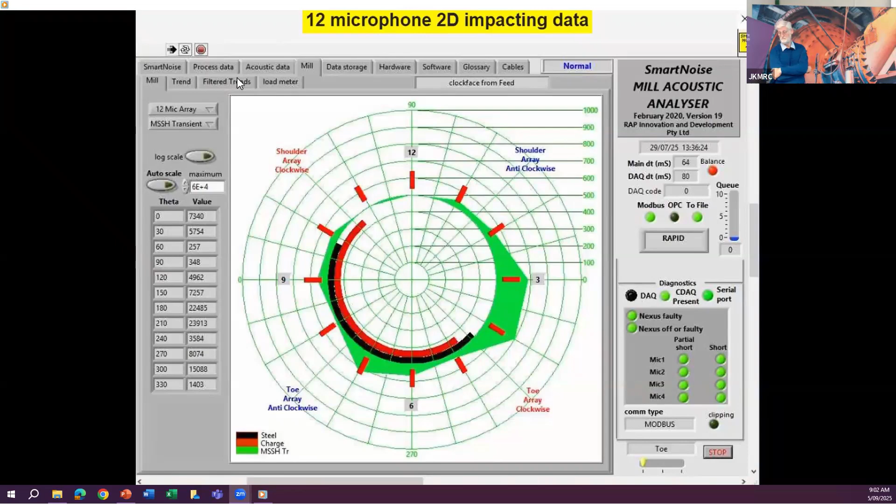What you were just seeing was the smart noise system, which I'll be talking about. It runs 100% of the time, doesn't have silly crashes, and that was real time on site, obviously a video. I've basically done the tech transfer out to sites with multiple installations.

As always, I stand on a lot of shoulders to get to what I've done and so on. And the presentation, I'll introduce a bit of grinding, not very elaborate, and then go through the measurement and acoustic measurement for grinding mills. The bottom photograph of me in my younger days, yes, I did have black hair.

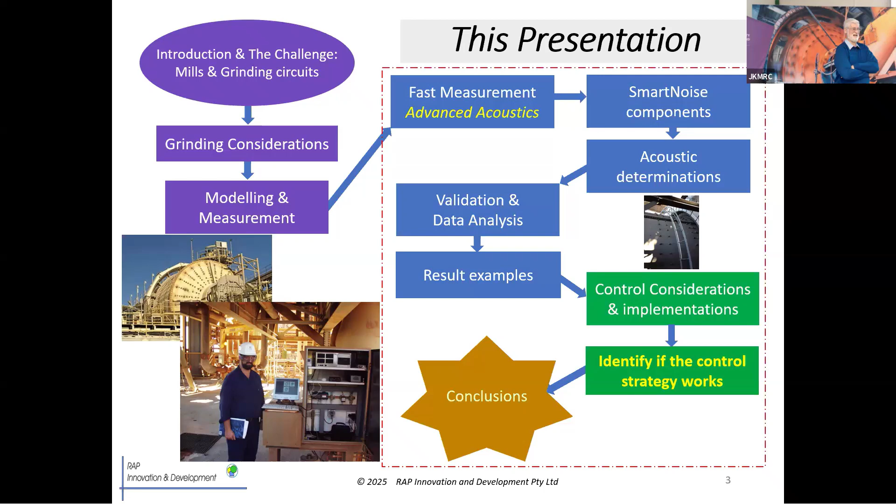Something happened along the way. And that was actually one of the installations where we had 8 microphones and strain gauges all mounted on a mill shell, and it all ran on a 133 Pentium, which some of you probably will ask, what's that? But I'll leave it as an exercise for you to find out what that is, maybe.

So, from a perspective, mining is a risky business. The object of mining is to obtain an element or a mineral because it's useful to Homo sapiens. We're Homo sapiens, us humans. We want these things so we can have our computers and roads and whatever else you name it, and toys for our kids. The process of mining has to cost less than the market price. The market price is dictated by demand, usefulness, and supply. Think lithium at the moment. It's gone through an enormous peak, and now rare earth minerals are becoming very much in demand, and the price is going up.

The risk is due to fluctuations, deviations in the technical and economic issues. But we also should bear in mind there's a lot of research being done, and has been done for a number of decades already, in development of competing materials for human endeavors. That particular reference, 2022, is a paper that talks about the chemistry of polymers, highly conductive polymers. So copper and silver won't necessarily be king in the future, and perhaps the demand for those minerals will decrease with time as more and more stuff gets done.

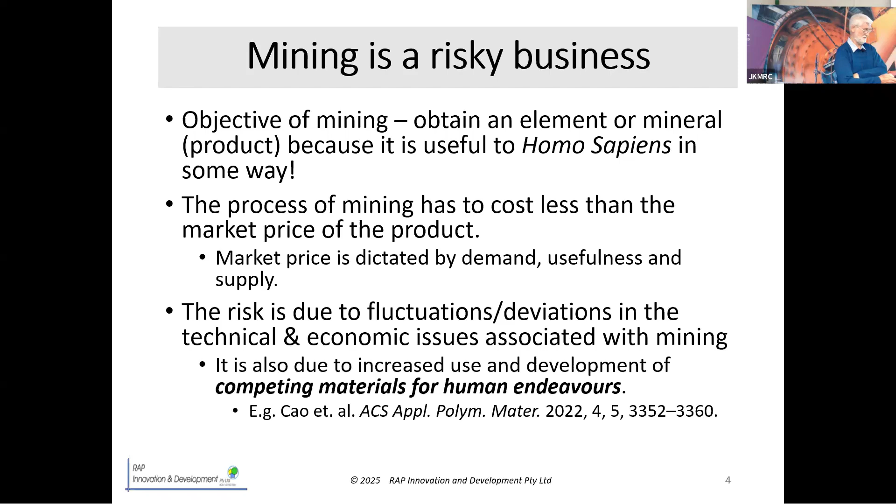If you do a literature search on polymeric materials or advanced polymeric materials, you'll find there's research being done all around the world. Risk mitigation models: one way of mitigating risk, which is also something that I believe we all do here, is use models. And we try to understand how our unit operations work.

We can use them for simulation like SimMet, plant design configuration, and we can use models within control schemes. However, the models are limited by the quality and quantity of the data. If empirical data is used, extrapolation is a dangerous thing. If it's real physical chemical models, then completeness is an issue. So, risk mitigation models: George Box in 1976 came up with this quote, which I'm sure we've all seen: all models are approximations, but some are useful.

However, it's not a license to ignore facts. Just because you've got a model that seems to work a good chunk of the time, it doesn't mean you know it all. Uncertainty is the status quo, and the world doesn't wait for the luxury of complete models.

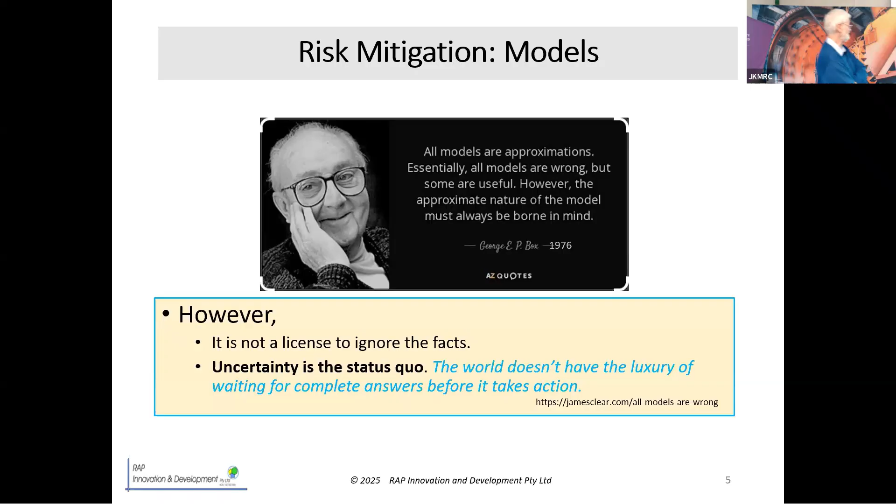So we need some measurement. The majority of plants have no or limited in-mill measurement, and virtually all measurements are conducted external to the unit operations. Some measurements are gross approximations or lack detail. And in this industry in particular, we rely on a very large number of particles in our processing, so we do what's called averaging, average behavior. Now, averages are a bit dangerous when they're done like that.

These measurements can be used within models, and we heard an excellent talk a few weeks ago by one of your people about soft sensing. It's come a long way here at the JK. Mill internal measurements are very challenging. It's a hostile environment, but smart noise tries to address that.

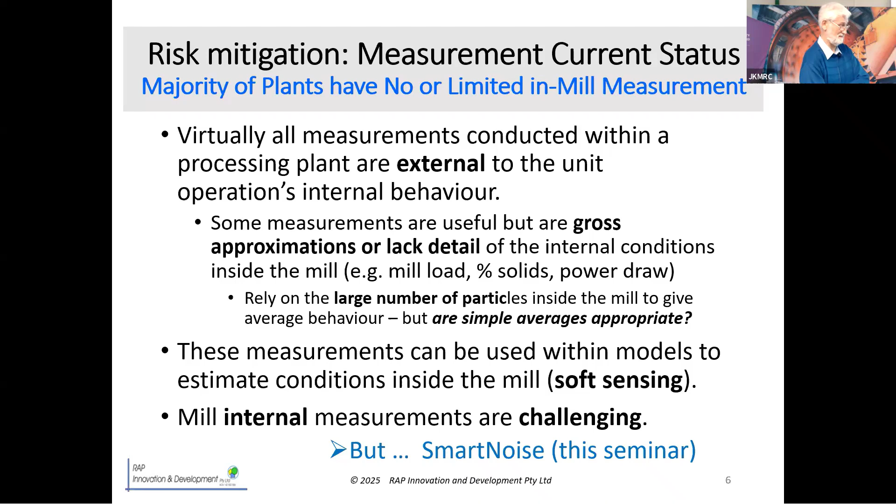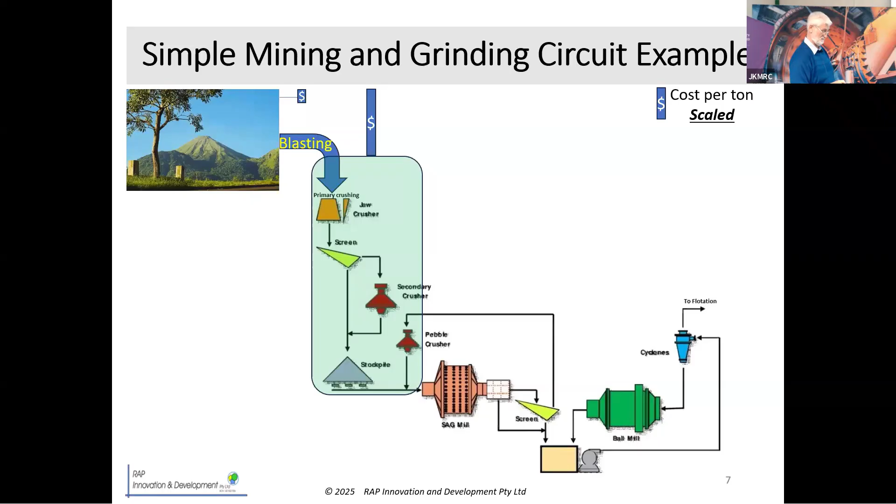So a simple grinding circuit, you've got a mountain, you've got some nice ore in there, and you geologists know more about how to deal with that side of things. It gets blasted. And notice I'm going to put up a set of vertical bars, which are cost per ton, and it's scaled. So the next step is crushing, and the next step is grinding, and there's a DEM calculation, a model, which is an approximation to real life.

And you notice first that the grinding cost is much greater than the other two. And in fact, 47%, according to this paper here, which is an old paper, of the energy cost of a mineral processing plant is in the grinding stage.

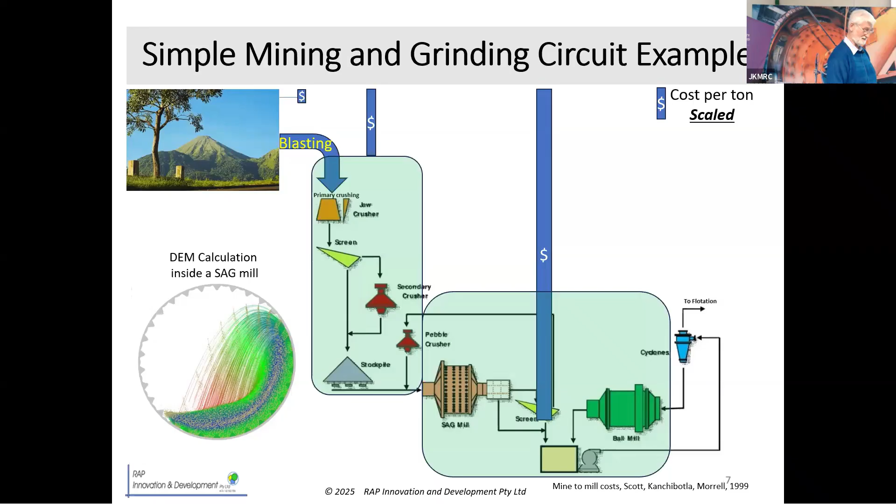Not very good. So to deal with this, again here at the JK, they were the first to do mine to mill, as in basically balance the blasting cost, which is cheap to do, against the grinding cost, which is much more expensive to do. The other thing you can do is improve measurement.

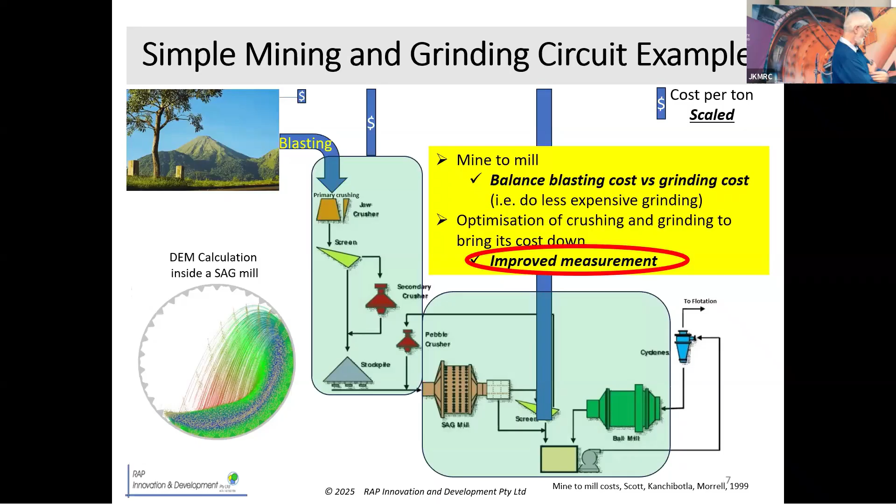And they had the technique to get these chips because they found them useful, cutting, whatever, poking, but they didn't have the maths. Now, in 1956, Broadbent and Callcott worked out a really nice matrix method for mathematically describing breakage. And in the 60s, Alban Lynch and the people, early days of JK, adapted it for hard ore breakage, and it's still used today.

So, operating conditions in grinding mills. We want optimal breakage rate, liberation, and throughput. The internal mill operating environment for ore breakage is very sensitive to feed ore variability in a mill. You speak to any operator, any metallurgist in the plant, or you play with it yourself, it's crazily sensitive, okay? You can't just hope for the best. It doesn't work that way.

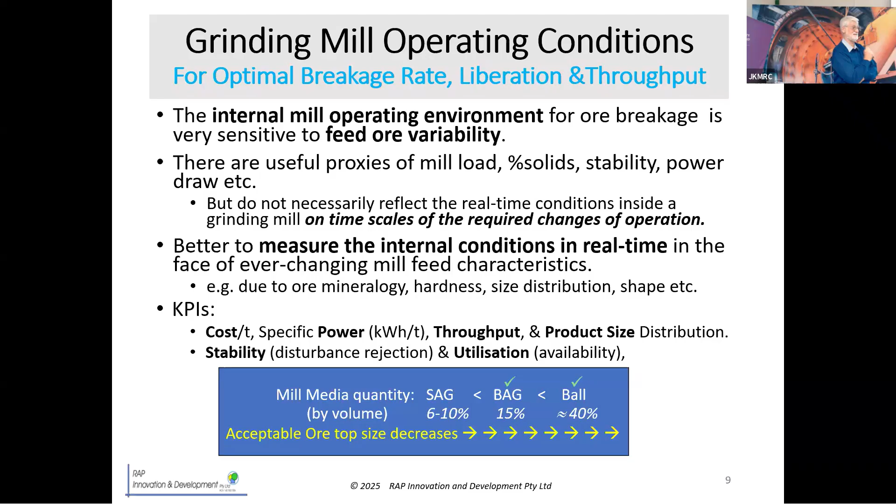For a ball mill, people have studied this in great detail. You might have 40 millimeter steel balls, but you can only put in something like 30 millimeter top size rocks, okay? It's quite significantly less. Unfortunately, people still think of bag mills as a SAG mill, and that causes them strife.

Utopia. Wouldn't it be great to be able to determine optimum conditions in real time? The new measurement could also inform new models, new timescales, new frequency content, i.e. dynamics. And ideally, the diagnostics you can do with this system should be quick, because time is money. I think of production gross value at roughly 2 million a day for most of the valuable ores we mine. So instead of spending a month, 2 months, 3 months to work out what a problem is with your circuit, if you can do it in a pleasant afternoon, you've saved yourself an absolute fortune.

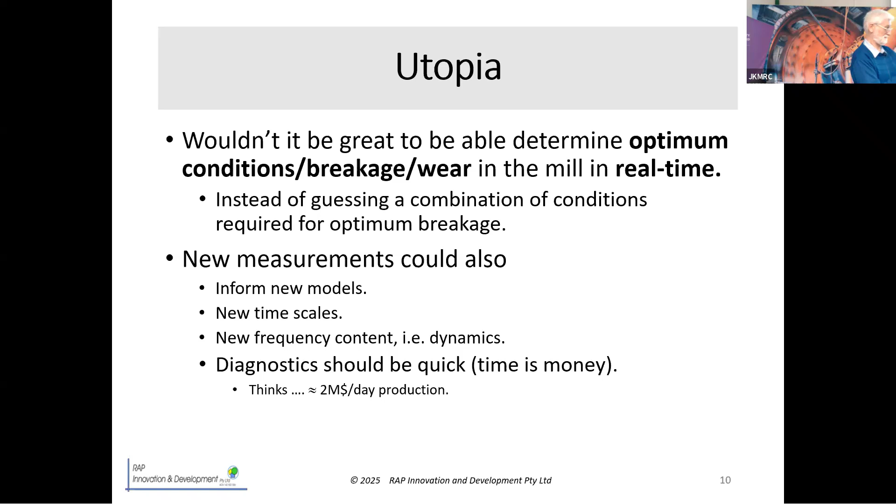So let's be curious with something new. Let's talk about noise. Noise from a mill is not random. It's actually a bunch of mechanisms, and it's an orchestra. The algorithms are about picking up those components of the orchestra.

The content of the noise depends on the circumferential position of the microphone. And you need particles to interact to generate noise. If I suddenly stop talking in this room and no one moves, you won't hear anything, correct? I start tapping it, and that's what's going on in the mill. It's the balls and the rocks tapping away. So noise only listens to that.

The toe and shoulder angles measured with noise will not be the same as for strain and vibration measurements. In practice, it turns out that the rock toe angle plus the rock steel toe angle, divided by 2 to take the average, is approximately the same as the strain. This has been used at one site to get the toe angle out from acoustic measurements, which can then be used in the power model to estimate the loading inside a mill.

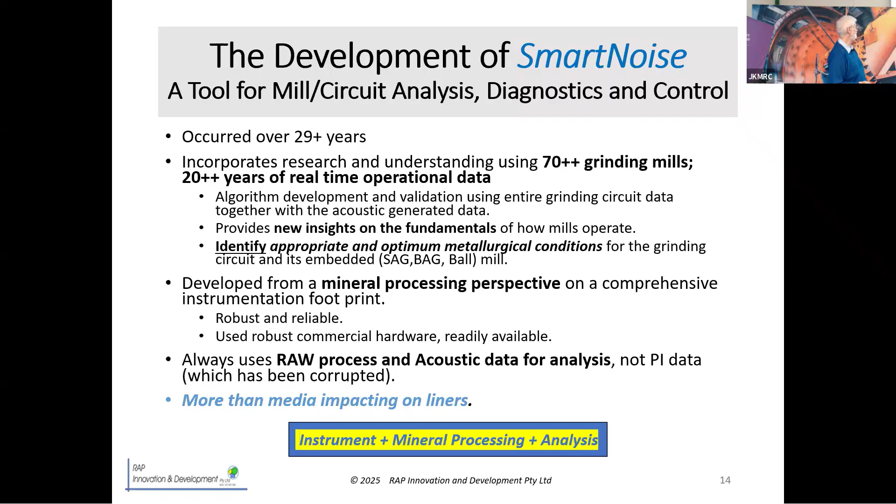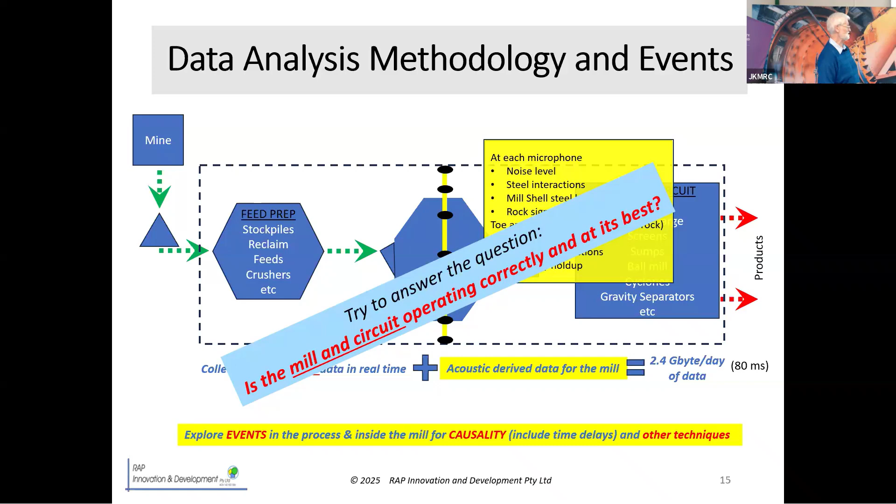And so Smart Noise is more than about media impacting. The methodology is to collect all the data, including the acoustic data. A row in one of my data files is around 350 data entries, and the rows are 80 milliseconds apart. So I collect a lot of data, trying to answer the question: is the mill and circuit operating correctly and at its best? I'm forever looking for events, and there's no shortage of events in a real plant - looking for causality and other issues.

So the Smart Noise system consists of 2 pieces of software, Smart Noise and Nexus Control, together with commercial hardware and communication with the site's DCS, to give us process data and also for remote access. We put together a comprehensive implementation and site support, training and documentation, data sheets and white papers. For those who don't know, white papers are discussion documents that tell you a bit more than the data sheets - more like a research paper, if you like. That's the system there: a mill, 12 microphones, amplifiers. The dotted line indicates what goes out in the field.

Occasionally, the field cabinet has to be internally air conditioned. And then there's communication to a computer, one bit for the Nexus control and the other bit for smart noise. And then there's obviously communication to the DCS at the site.

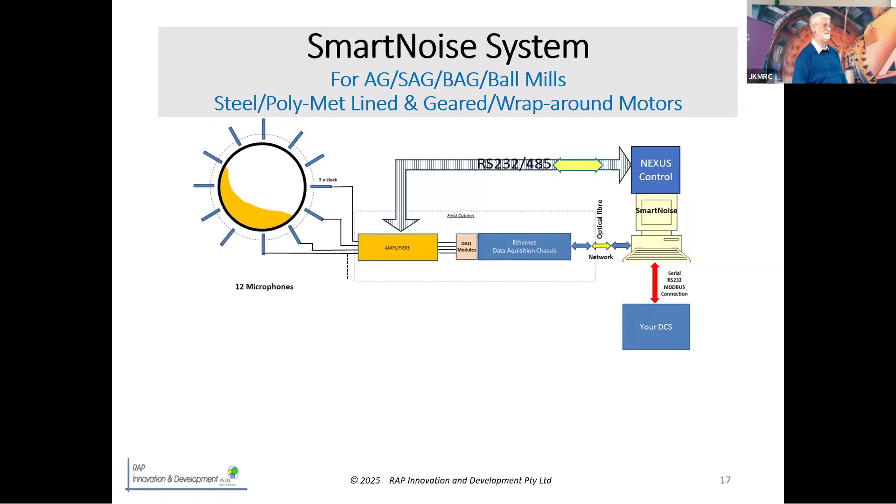With a switched on site team, once the equipment is in place, getting all this comms going and everything is trivial. I mean, it can happen in days.

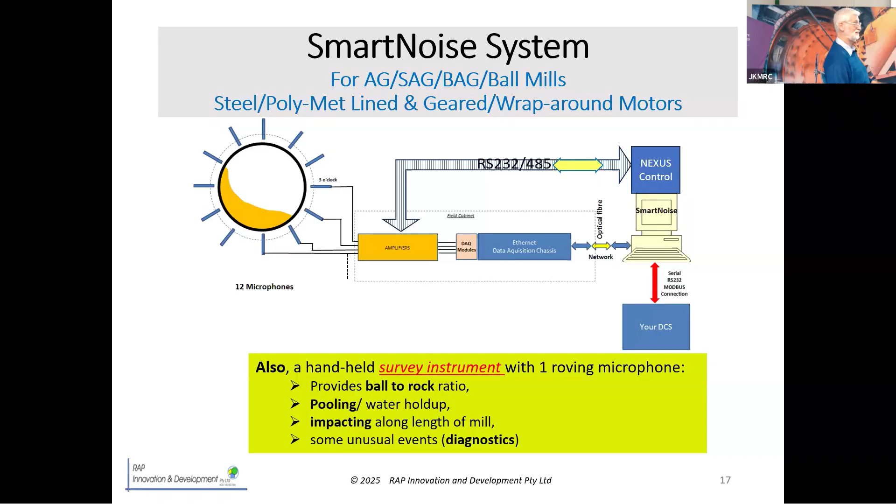There's also a handheld instrument. I take my laptop and a roving microphone with a little bit of electronics, and I measure along the length of the mill, both sides, and I've got more detail.

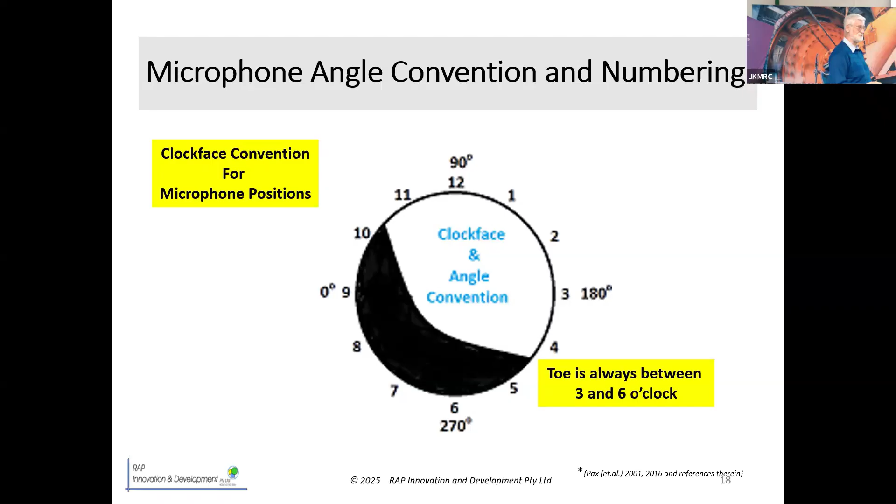The numbering convention is the clock face, or mirror of the clock face, an analog clock face, not a digital clock face. Digital doesn't work.

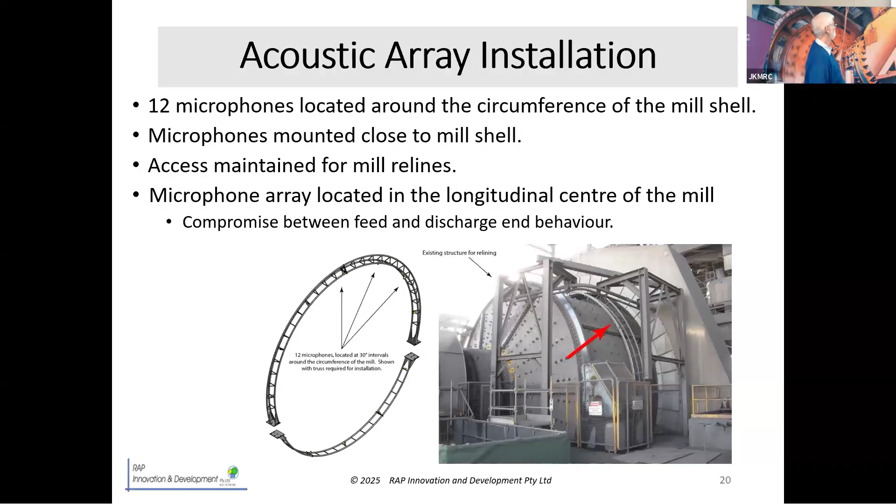They're very directional. So you've got to allow access for relines. And there's a microphone in place. They get grotty, that's not a problem.

Why 12 microphones? Normal competitor systems use 1 or 2 microphones. Some of them say rather cheekily they've got an array of 4 microphones. That means they've got 2 microphones for one direction and another 2 for the other direction. They've really only got 2 microphones operating at any one time. So each microphone has different information content, and at each location there's different impacting mechanisms.

The background noise rejection is much better than 60 dB. 60 dB means, with me talking, a pin drop onto this floor, it can still hear that. In the presence of me talking, the software and everything will still hear that pin drop. And in fact, I have done that. I can hear the screeching of the steel balls inside a mill as it's going around, and all sorts of stuff. I can pick up one ball if I wanted to, which I don't, but I have done for curiosity.

Simultaneous measurement allows 80 measurements per revolution, per mill, per microphone. 12 microphones also give me a massively increased robustness, reduced uncertainty and confidence of measurement. Because at the end of the day, those 12 microphones have to be connected in logic. What's that logic? Mineral processing, mill operation logic. Having one measurement doesn't do that.

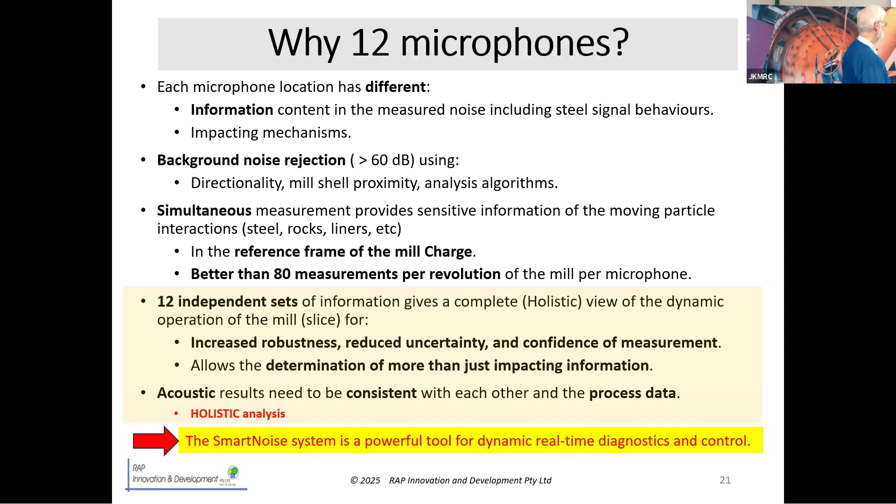And the steel signal determines only the steel interaction between steel objects in the mill. How have I tested this? One of the early tests was using it on an AG mill, a rubber-lined AG mill, no less. And the signal went to 0. It wasn't there, so that's really nice. And then I've had other confirmations as well.

In the ideal situation of rocks and media in a mill interacting strongly, the steel signal is at a minimum. It's not 0, but it's a minimum. If there's not enough rocks in the mill, the media interact a little bit more. And if there's no rocks, the steel signals go through the roof. That's a grind out, and I really mean through the roof. Typical numbers, maybe my units 1, this through the roof signal, 10,000. Very sensitive.

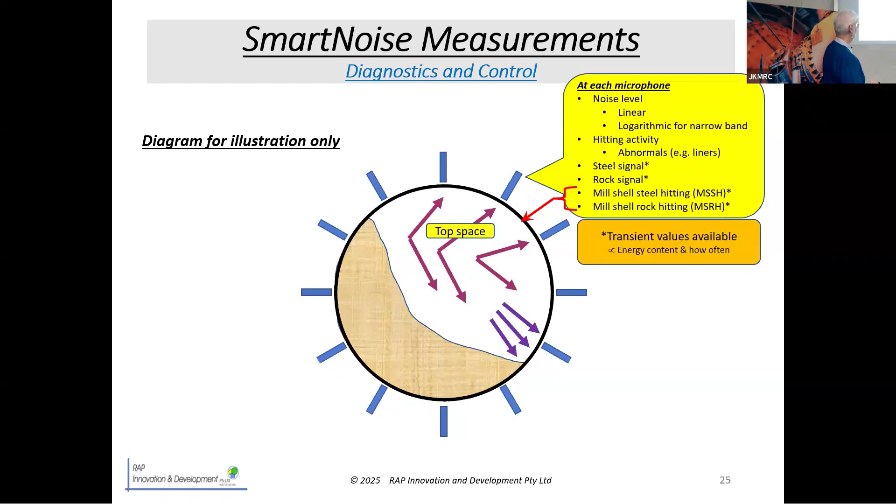Normal high-speed impacting or normal speed impacting. There's also something which is one of the new results: top space. Now those DEM calculations, trajectory calculations, etc., say that doesn't happen. It shouldn't be happening. Well, it's not true - it does happen, and there are good reasons for it happening. It's basically a billiard table in the top half of the mill.

I measure shoulder angles and toe angles. I measure the ball to rock ratio at that microphone. I also measure the water/slurry holdup. Marco, notice my little thing there - I know that's wrong, that picture is wrong, but this diagram is for illustration only.

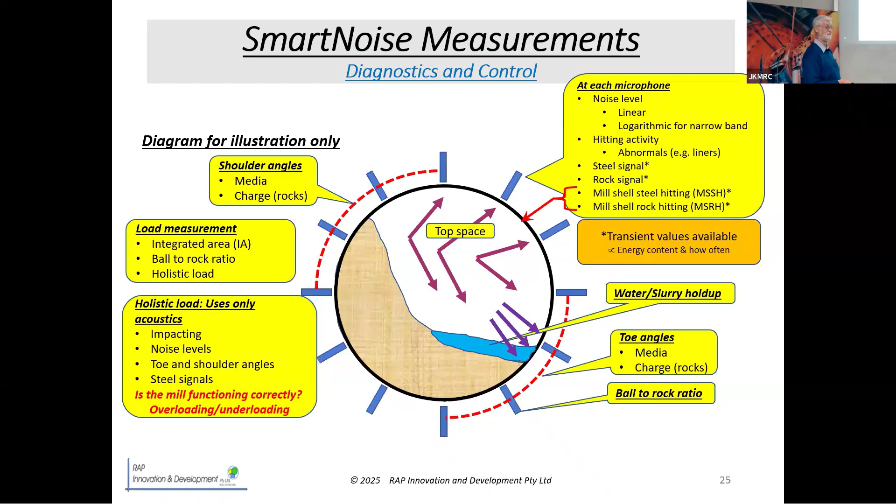I have load measurements, which are integrated area, ball to rock ratio, and holistic load, which I'll come to. The holistic load uses basically all 12 microphones, so it's an all acoustic load measurement. These signals can be used for all sorts of control aspects as well, to provide a logical, self-consistent diagnostic picture of a mill.

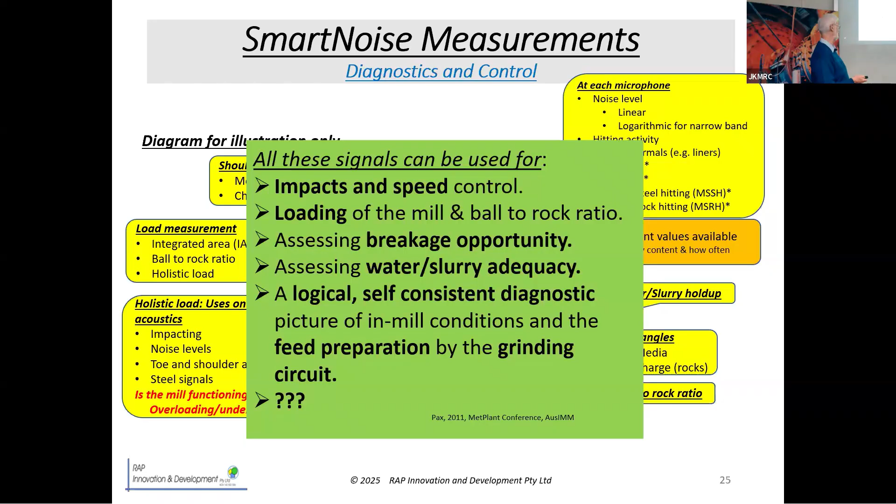So much so that when a system first starts up, it's all been installed, I switch it on, have a look at the thing, and I immediately pick up a few points important for the site, for their grinding mill, that they weren't aware of. And this has happened all the time. You saw before the beginning of this presentation, an interface.

The SmartNoise interface - this is just a summary. The only bits I really use are these last two, which summarize the acoustic outputs. And of course, I want to see if the mill is running and its percent critical. The real speed isn't really important, but the more useful number is the percent critical. There's all this diagnostics over here to tell me whether the system is functioning properly or not.

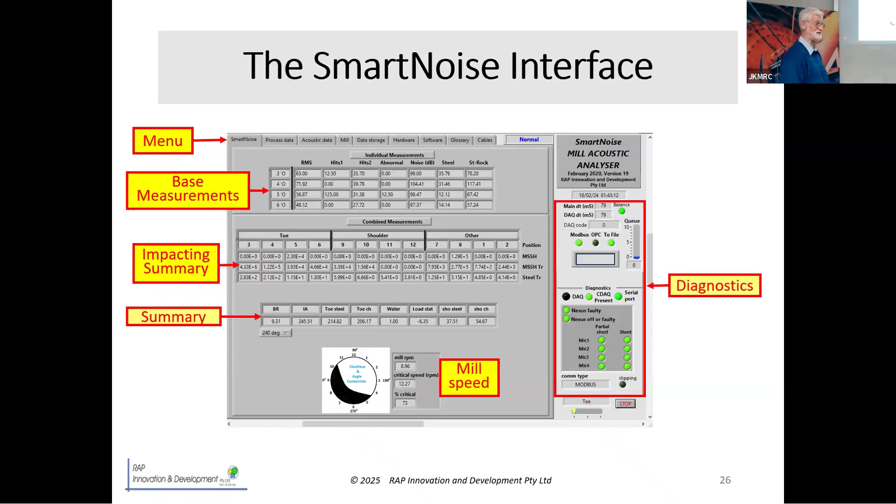The other thing possible with this software is the time scales on the process data and the acoustic data can be made exactly the same, 44 minutes, so you can compare like with like. In this particular case, just to illustrate the power of it, here's the scats rate or pebble generation, and we can see the toe angle being influenced by the scats - obviously there's internal stuff going on that's influencing the steel shoulder angle.

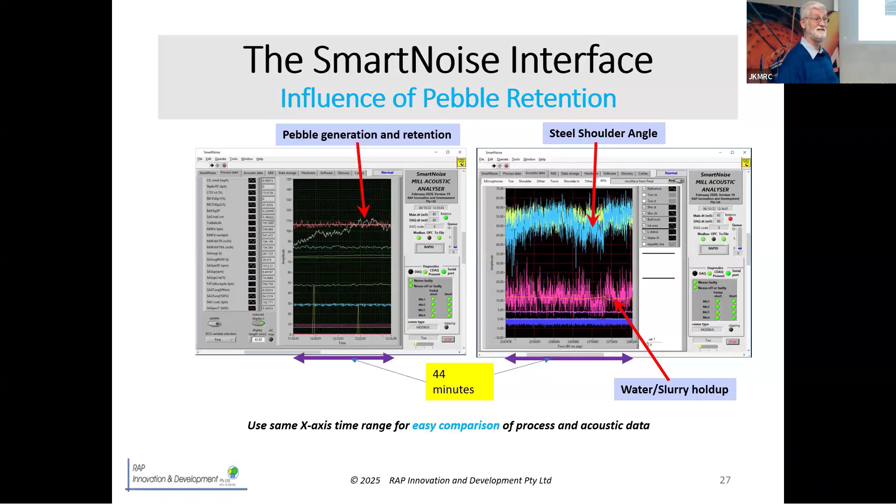Here's a little experiment where we unloaded a mill and then loaded it up again. The blue line is load cell values, and the green line is the steel signal. The thing that really strikes you with this data is that the steel signal basically saturates before the load cell values - in other words, the rock is in between the steel balls, but the steel balls can't capture any more rocks in their midst.

But the rocks are still piling in, and so essentially you end up with an extra phase. So another revelation is these mills can operate and get to the point where there are two phases in the mill: a steel plus rock phase, and a rock only phase.

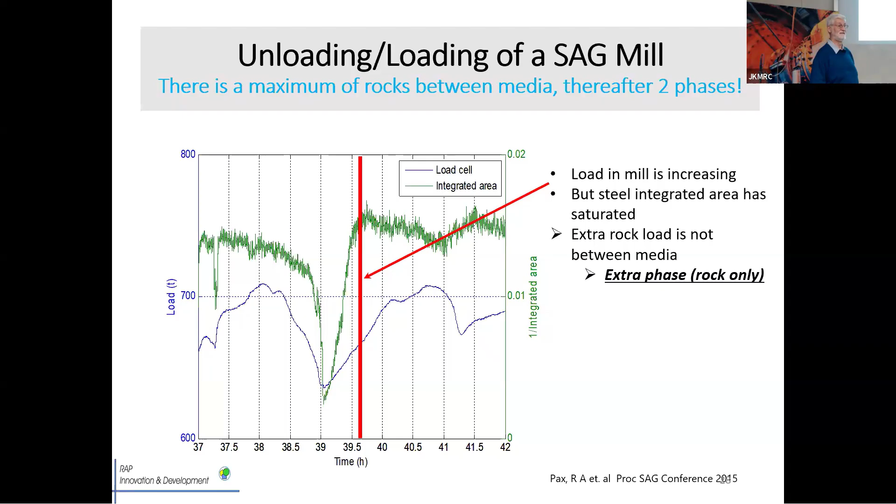Here's another validation point, ball to rock ratio, using crash stop data - as in opening the mill and measuring and coming up with what the load is inside the mill versus the steel signal. And we see quite large errors. It's not something this industry talks about much, error bars, but the error bars on the crash stop data are much larger than on the steel signal, and that's an acceptable correlation.

We also did a test where a bulldozer put very large rocks into the mill, and they didn't integrate with the steel balls very well. That shows up here as a data point that doesn't fit on that other correlation. It's a nice validation point of the steel signal, showing we're actually measuring real mineral processing stuff inside the mill.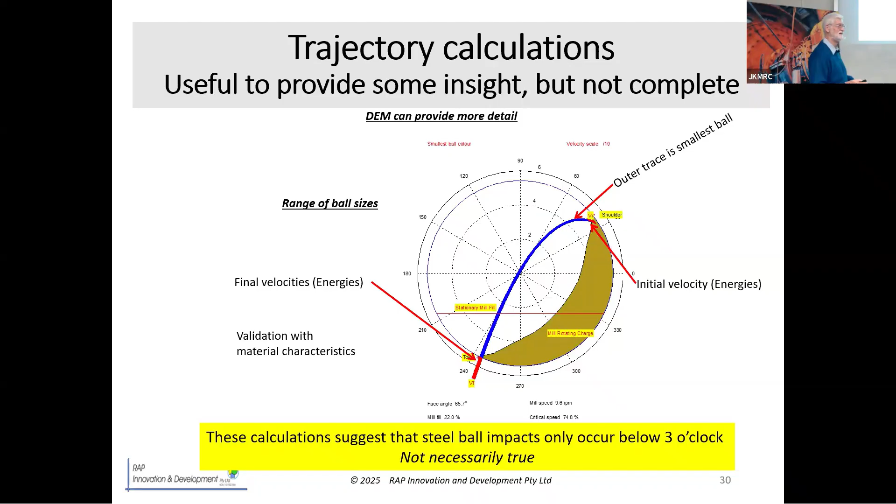They're quite nice, actually. So when you use your microphones around the mill, these are the two conventional microphones. You see a lot of activity. I've got the process data, and you're seeing a lot of activity.

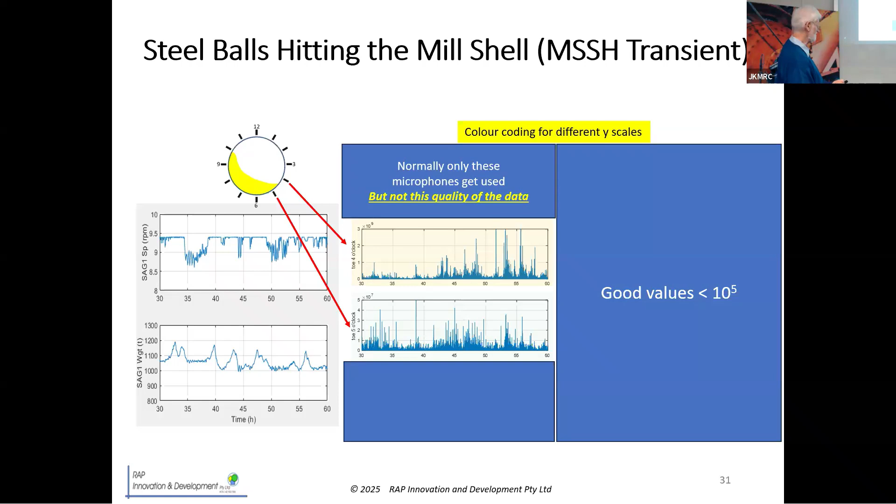If we now go to some of the other microphones, including the shoulder space on the right-hand side, there's stuff happening everywhere, okay? And because of the directionality of the microphones, you've got unique measurements. The stuff happening on the far side of the mill compared to where you're measuring with a microphone, it's just not hearing that. It's down in the noise. This is stuff happening at each location.

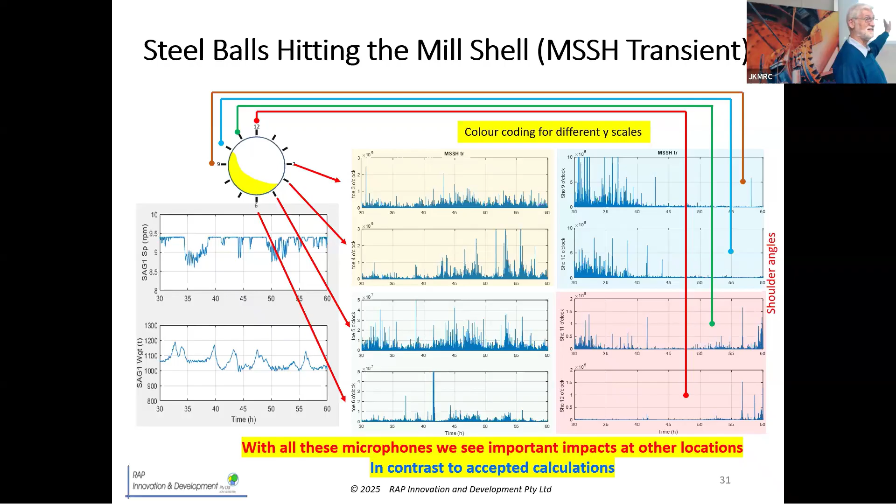And you can do a 3D version of the impacting around the mill, and you're seeing impacting in the top space. You're seeing conventional impacting. There's, to even get a steel ball going to 3 o'clock, you need special conditions.

The code for the trajectory thing, I was on site and it suddenly hit me that something was amiss. Why am I hearing things at 3 o'clock? So I wrote my own code, spent a day doing it, getting it working, all in MATLAB, and did what I just explained to you.

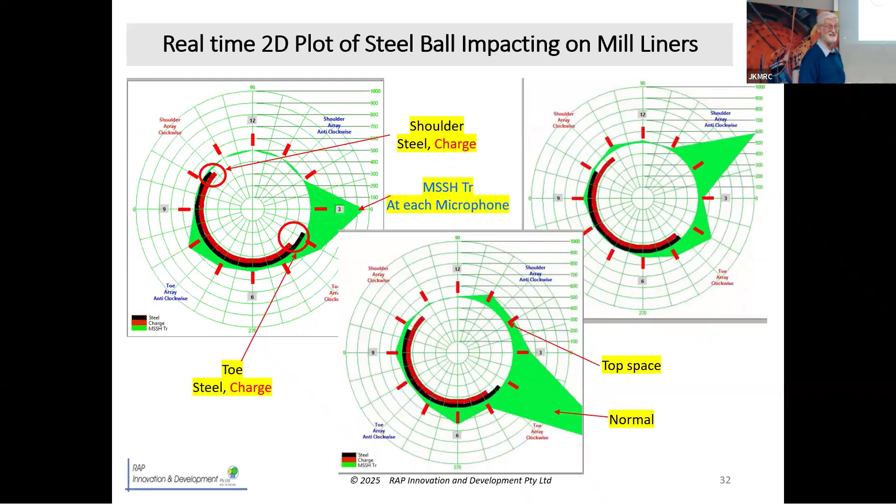A much more powerful way of presenting this data is like so. Here we've got microphone position. I see, if I keep it down, it does more screens. I see, I get it.

On the right-hand side, you're seeing impacting at virtually every position, including the top space. But notice this discontinuity at 6 o'clock, okay? Because that's where the gravity is supporting the charge going down. And on the other side, gravity is not supporting the charge going down—the lifters are doing the work.

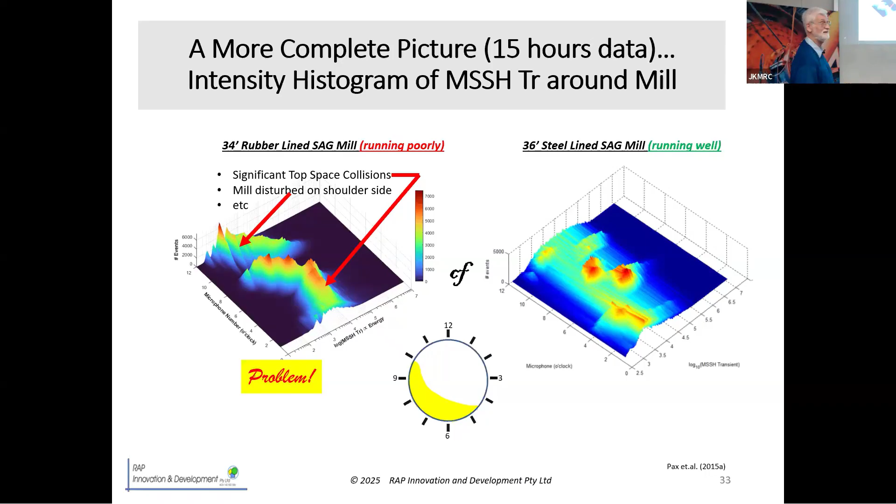In contrast, for a polymet lined mill, similar size, they've got real problems, okay? They should be getting what I'm showing on the right-hand side, but they've got balls flying everywhere. And there's even some structure here, which I won't go into, which is stuff going on in the shoulder space.

Okay, factors affecting media impacting. Well, speed—everyone knows about speed. I'm always at pains to explain to people, rheology is really important, okay? If it gets really sticky, and it does get really sticky up there in the shoulder space, then you're going to delay steel balls leaving the lifters. Or particle size, maybe shape, because it pins the balls onto the lifters.

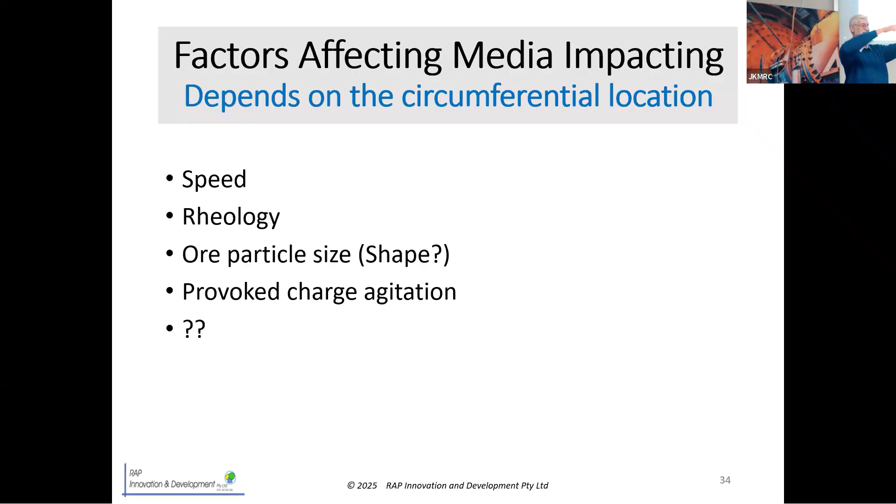And I've had a recent discussion with Paul Cleary, who in my book is the guru of DEM. And he actually asked me whether I see that. And I said, yes, I do. It shows up very obviously. And he says, why don't people, the mills, encourage a little bit of that? Because you actually end up having more energy for impact.

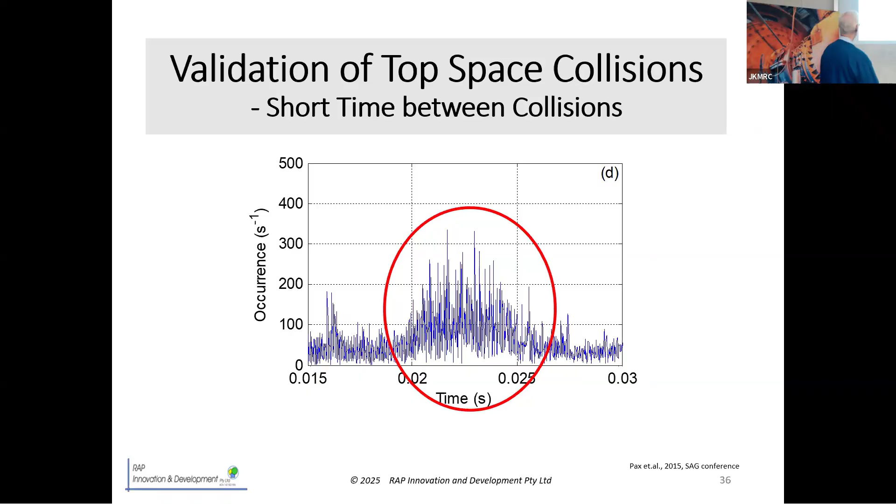As a validation, if we understand the spectroscopy a little bit, then I can see the signals for the top space collisions. They're very short duration. And here's a very pronounced peak of a range of top space collisions.

Right, but hurry up. Okay, with multiple microphones, if I've got 4 toe microphones, then instead of using one microphone, say at 4 o'clock, to measure the impacting on the mill shell, it occurred to me that it would be smarter to come up with a metric that uses all 4 microphones in the toe space.

I've also got a water hold-up signal, which on some slides you'll see called equality - same thing. It's a value measured using a number of microphones around the mill, with some signal processing. It's a measure of water hold-up and fines, as in fine material that's been generated in the mill. It's very hard to separate the two.

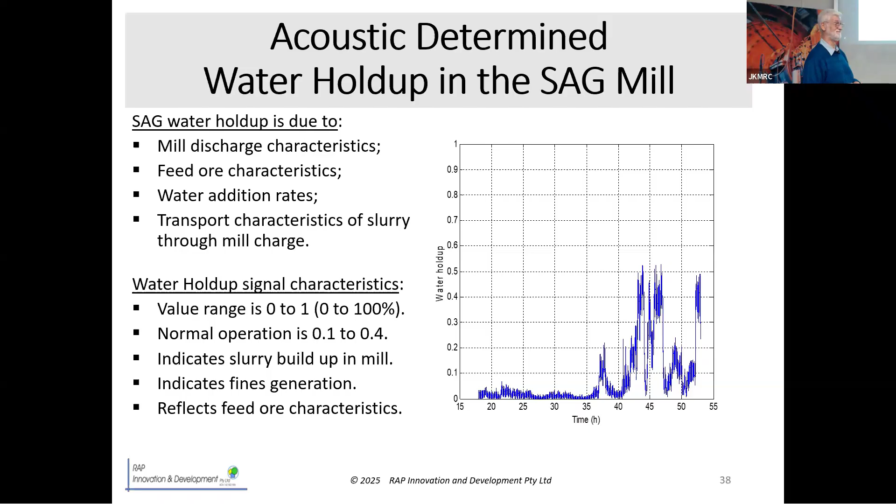At one site, we were playing around with trying to get more throughput through the mill, and we could see, using this signal, when grinding was getting more efficient inside the mill, because suddenly the water hold-up signal went up and stayed there. It was still within the range, but it just went up. So we played a bit more to confirm and validate it, and it was a treat to see. I believe that's still the first time anyone has ever measured grinding happening inside a mill in real time without models.

Okay, here's some scanning data. Actually, I'm running out of time, so basically the next 3 slides show how the water hold-up varies with position of an array. This was a really nice installation - I didn't ask for it - where they provided a stepper motor drive for a set of microphones to sweep the length of the mill backwards and forwards, and we could do that in 6 seconds. As a physicist, I thought, you beauty, let's have some fun.

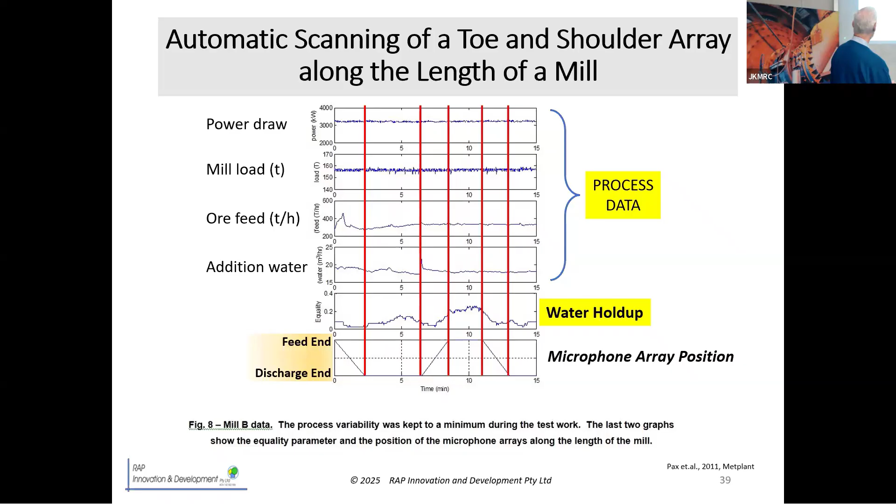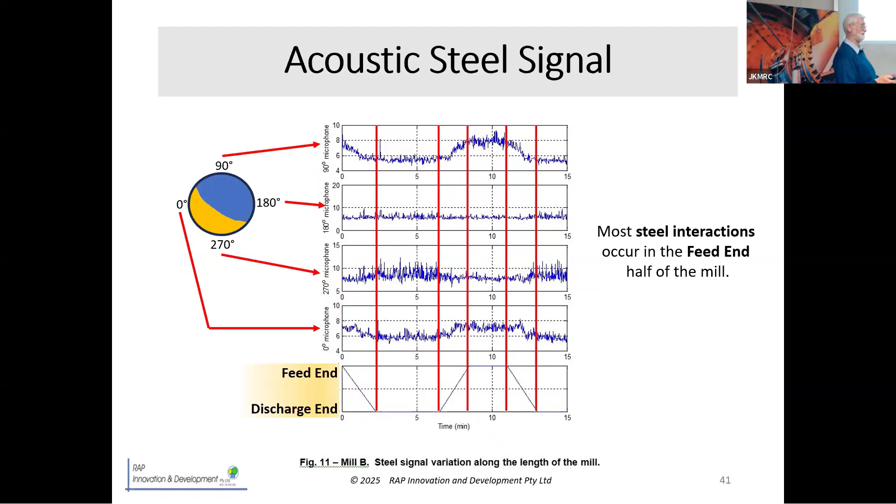And so I did, and got these sort of results, which show that the water hold-up, for example, is located - most of the water, or a lot of water, is located at the feed end of the mill. The RMS signal, or noise level signal, changes a bit, but it's not very stark. The next interesting one is the steel signal, which shows that the steel balls are interacting a lot more at the feed end than at the discharge end. That shouldn't surprise us, because at the feed end you're feeding in the rocks - large rocks - disrupting the charge, and the steel balls basically start clanging together.

This is a comparison of my integrated area signal, which is a proxy for load, comparing it to the load signal measured by load cells. You can see it trends pretty well - certainly within the 30% error bar that's okay in this industry.

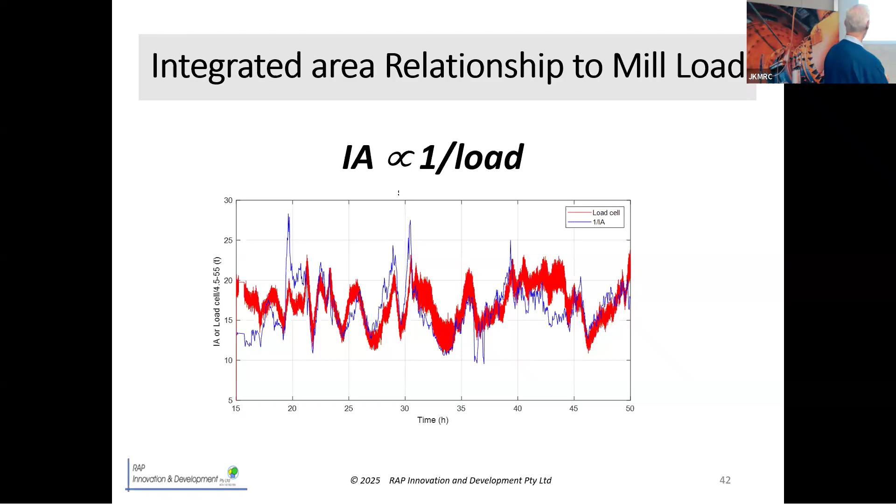This is another trace of KPIs, or what I call KPIs, which are the toe angles and shoulder angles, water hold-up, and integrated area signal. We notice that the water hold-up is actually quite high in this region, and then it drops right down, probably due to a feed disturbance of some sort. This dotted line here - when the water hold-up reaches that level, you've got a pooling situation.

I recall very early on, in 1998, I was relatively new at the JK. A whole team of people had gone up to a site, done measurements, done a survey and analysis. They said the mill was pooling. I went up about a month later with my equipment, and so this question came up: is it pooling? I did some measurements, and... excuse me.

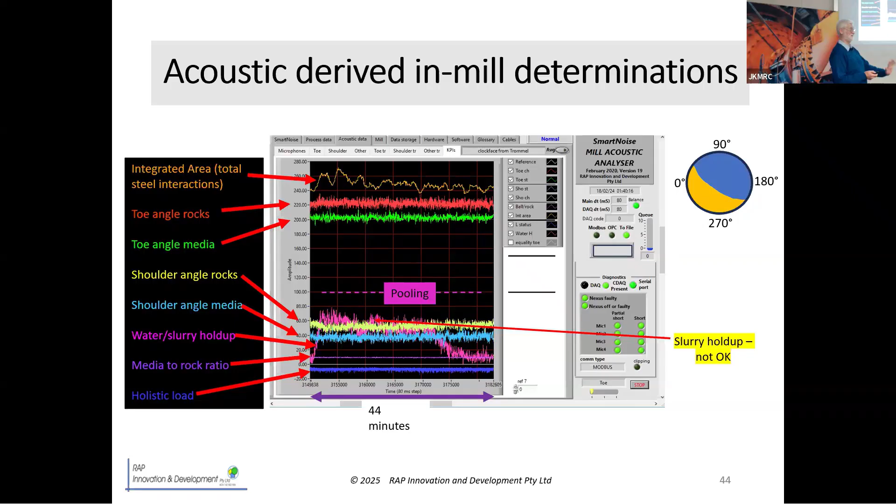This is the integrated area. It's actually going very high, so the mill is seriously unloading. But you notice that the water holdup is decreasing every time this is happening. That's because when it's unloading, there's no rocks, there's no fines being generated, or not very much, and the water can rush through the matrix of steel balls.

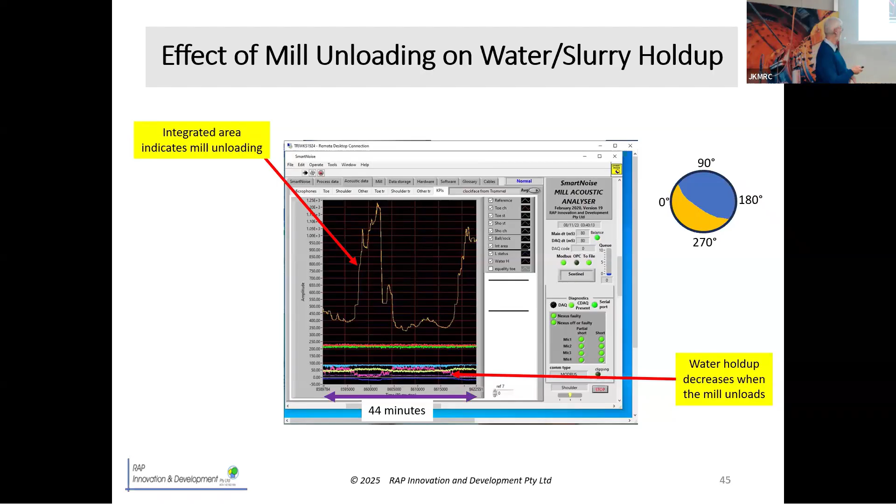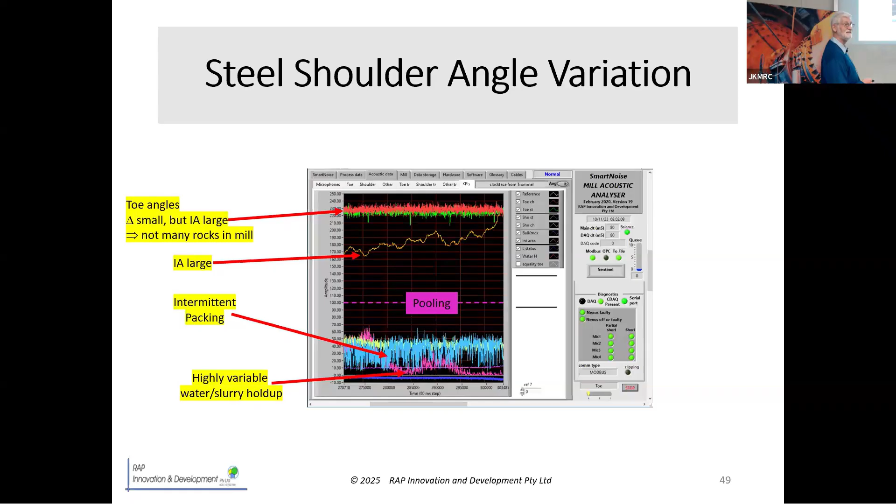A little aside - at one site, I actually got the project with them because they were told their load cells had to be replaced, and they didn't want to do that. So they thought they'd give acoustics a go. And me being me, I got the load cell data, individual data. I did a bit of modeling and so on, and worked out how to correct the load cell data - the four outputs from four load cells - and ended up with corrected load cell data.

Now the load cell reading is the same whether the mill is running or not. For those of us that have been out and seen mills, normally that's not the case, but I've corrected for all the motion and everything else.

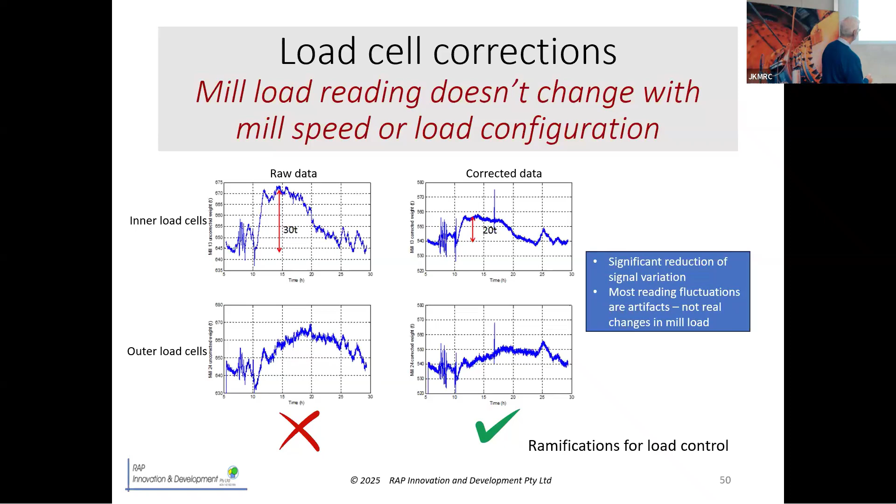The other thing that shows up is all the noise that you see on the raw data is basically being wiped out. So when you do load cell control in a real situation, you're chasing these fluctuations, whereas you really should be chasing this much slower variation. That's really, really important.

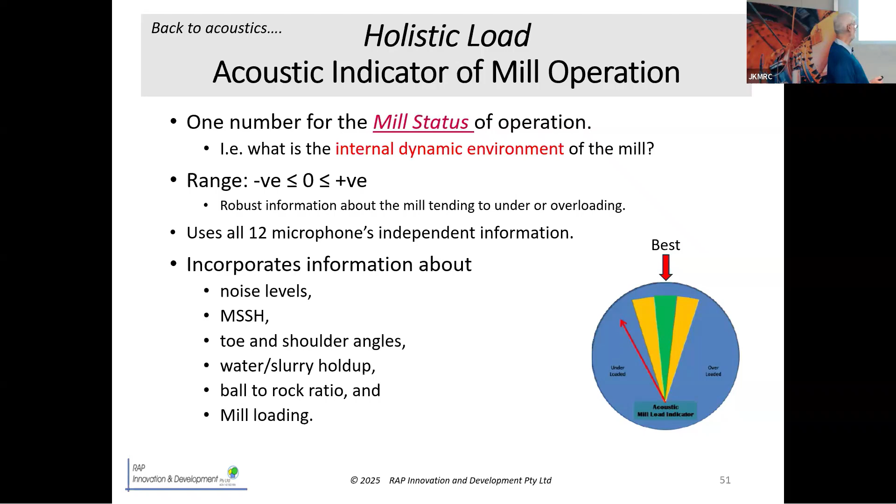I mentioned that because in a minute I'm going to compare load cell data with holistic load and so on. Holistic load uses all 12 microphones, a whole bunch of information, and it's set up so 0 is everything's fine. If it's greater than 1, then it means the mill is heading for overload very sensitively. If it goes negative, then it's heading for underload.

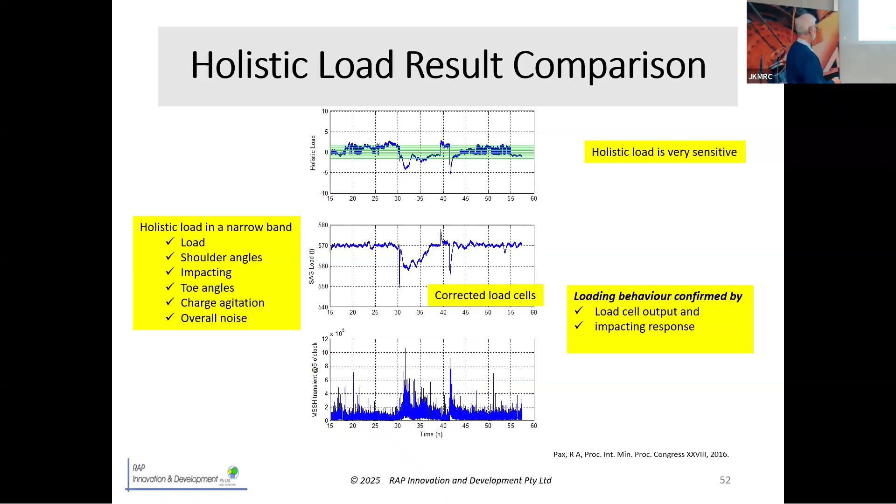Here's a comparison of holistic load within its band, the sag-corrected load cells, showing that when the holistic load goes down, the corrected load cells also go down. I got it - confirmed by the impacting increasing as the mill is unloading.

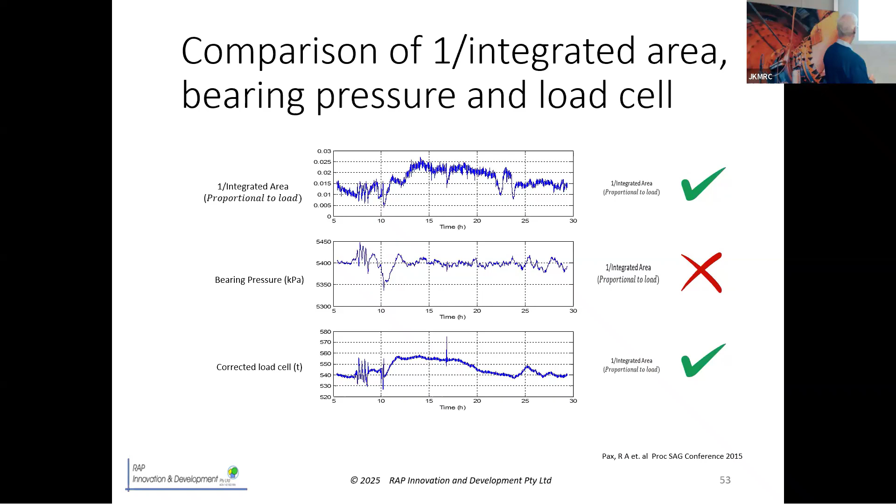Here's a comparison of load cell, integrated, 1 over integrated area, and bearing pressure. And quite clearly, bearing pressure doesn't work very well. This is great sensitivity - a 5 millimeter increase in F80.

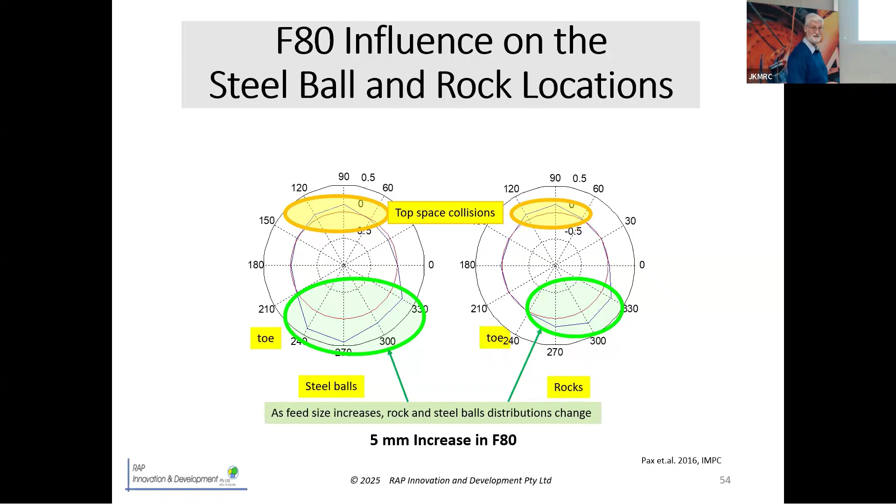Comparing the process data, which works out all the correlations that should be there are there. And then we can use the acoustic data, and we can see that as we increase the size, we get more power use, we get reduced breakage opportunity, less water in the charge, etc.

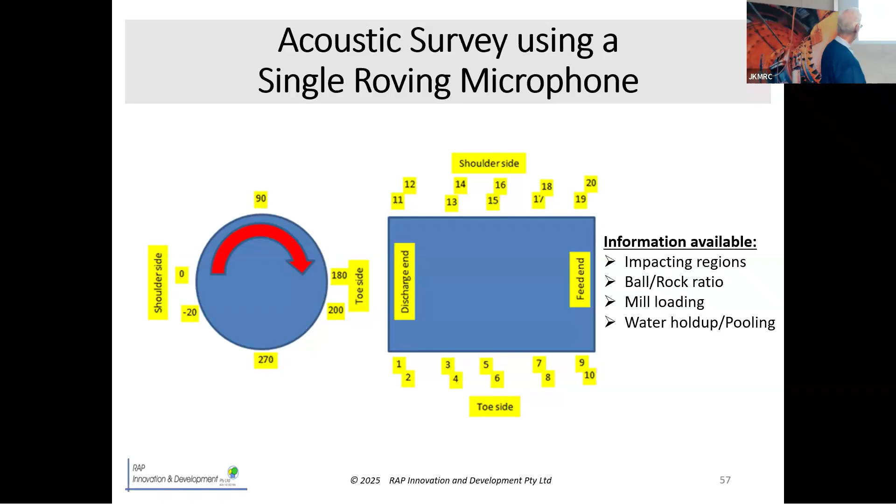This is the survey methodology, doing measurements either side of the mill. I find my height is an advantage, because on a 40-foot sag mill, that's 180 degrees or 0. And down there, when I crouch down, is about 200. That difference makes a big difference.

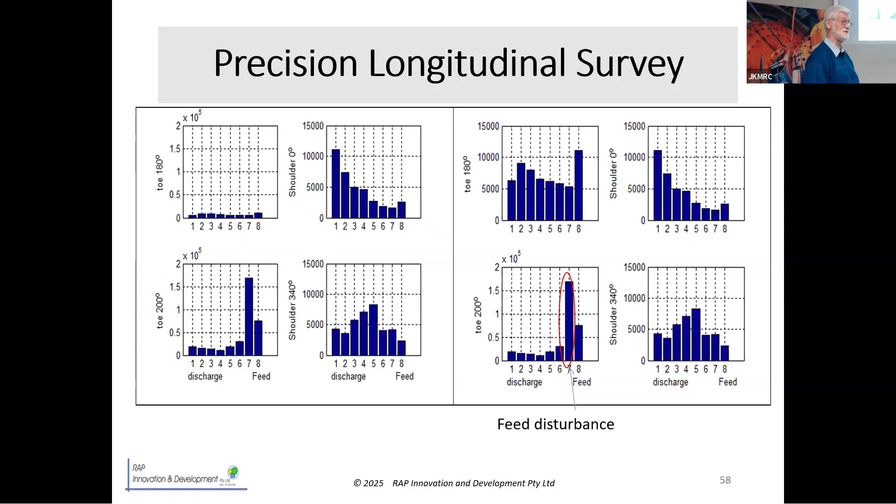As another confirmation, a ball mill - measuring along the length of a ball mill, at the feed end everything was fine, coarser material, but when you get into the second half of the mill, I got no hitting events.

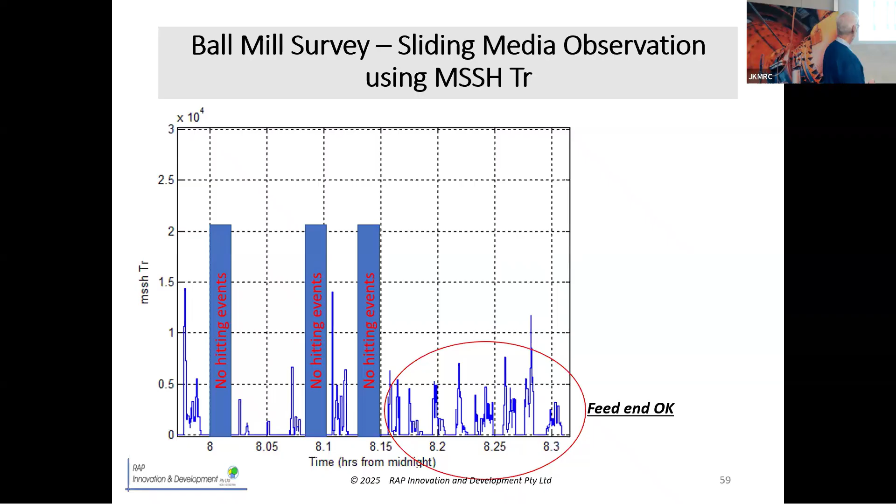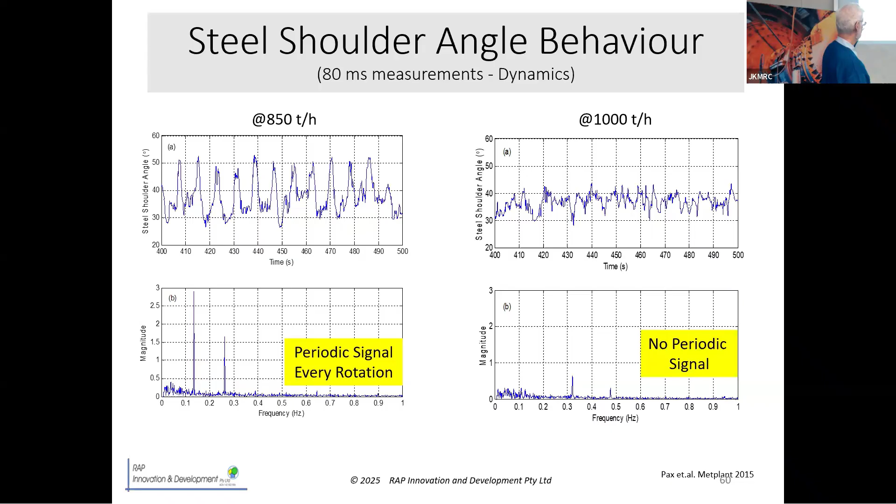I'll skip this one. It's in a paper, Metplant 2015.

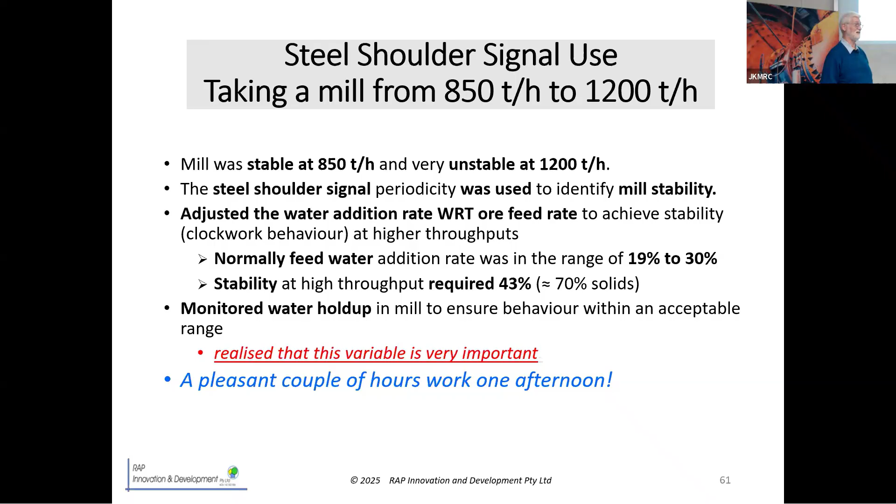In a couple of hours with acoustic measurement, we took a mill from 850 tons an hour to 1,200 tons an hour and stable. Previously, they couldn't get there.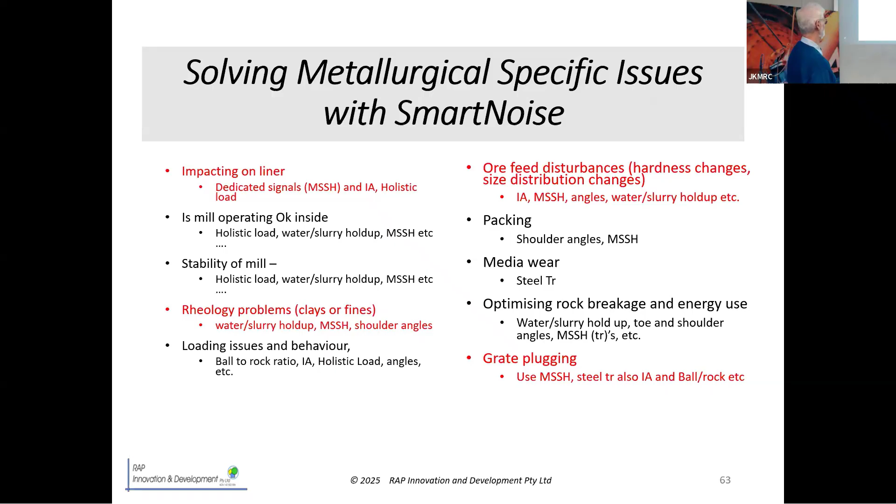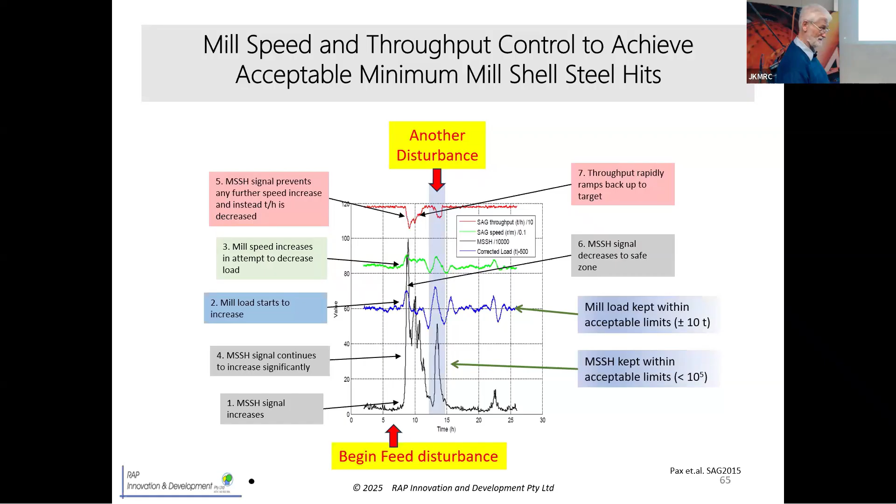We can solve a whole range of metallurgical issues with the signals, a little bit on control. This is basically speed and throughput control to maintain an acceptable hitting. You know you've got it when the only serious variation you have is in the toe charge angles, toe rock angles. Everything else is basically stable.

The little blip in the middle was actually a water disturbance. I won't go through this.

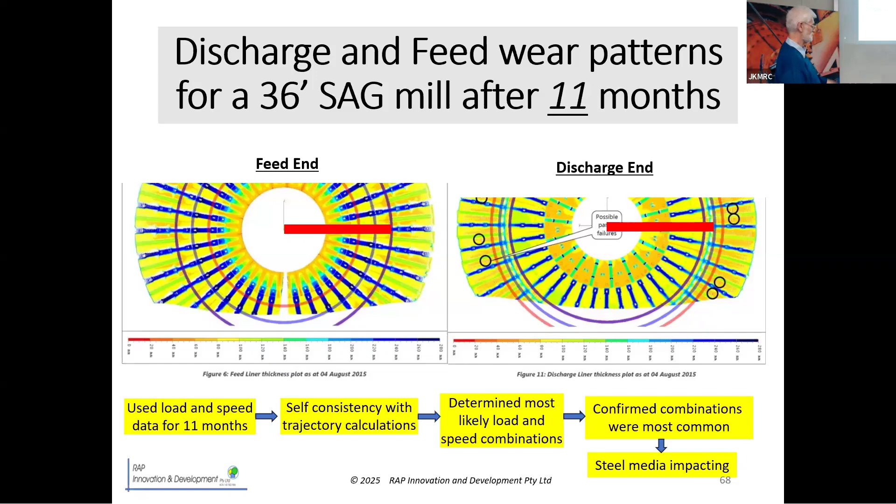One interesting thing that came out: they approached this particular mill, people approached me with, why have we got these wear rings? So I said, okay, let's assume it's steel ball impacting on the feed and discharge ends. So we uploaded all the data for 11 months, calculated self-consistency with trajectory calculations etc, most likely combinations, and it was still media impact.

This is a consequence of running a mill too well. You don't want to run the mill too well. If you do, change it a little bit often, because otherwise you get funny wearings.

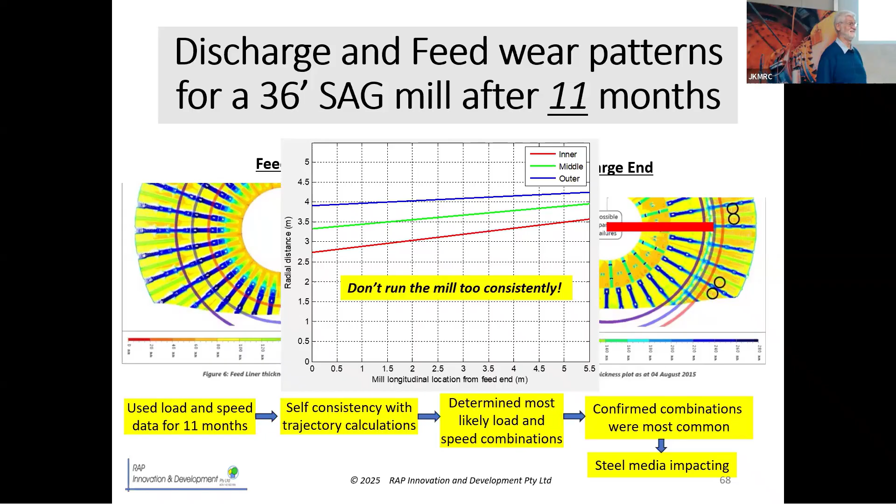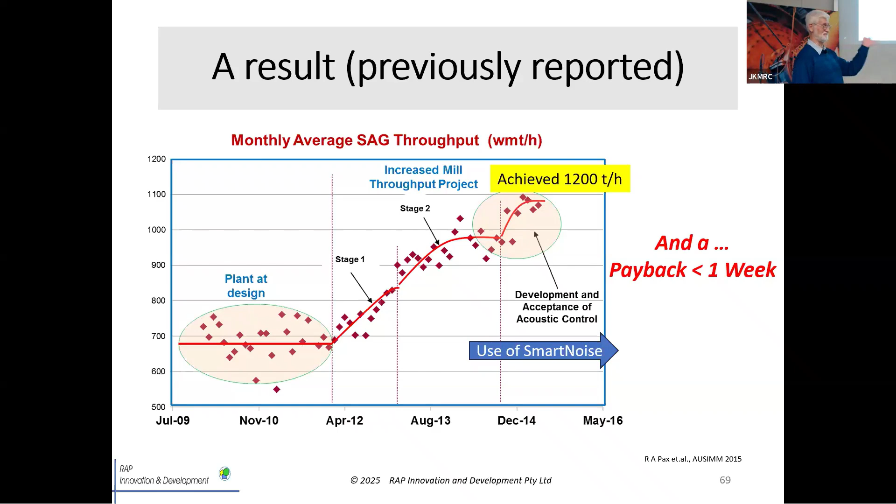The payback of the system is less than a week. It actually works out to be about 2 days. This was a 2.5-year project, doing a lot of other stuff as well. It was a very quick payback.

So the conclusions are that the 12 microphone array is a robust, proven, unique measurement system for real-time internal mills. It's a fast measurement system. Grinding mills are very sensitive to frequent feed ore disturbances.

Water holdup indicates grinding in the mill. Rheology of the slurry influences the mill. There are particular shoulder mechanisms — a lot of people focus only on the toe, but the shoulder is much more interesting. It's rapid diagnosis, powerful control signals, mill liner protection.

That's a boring one. And it enables stable and consistent operation.

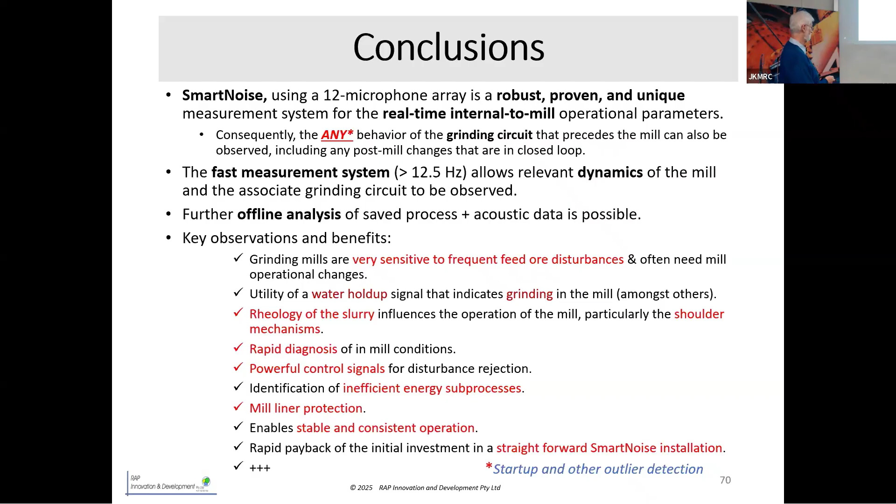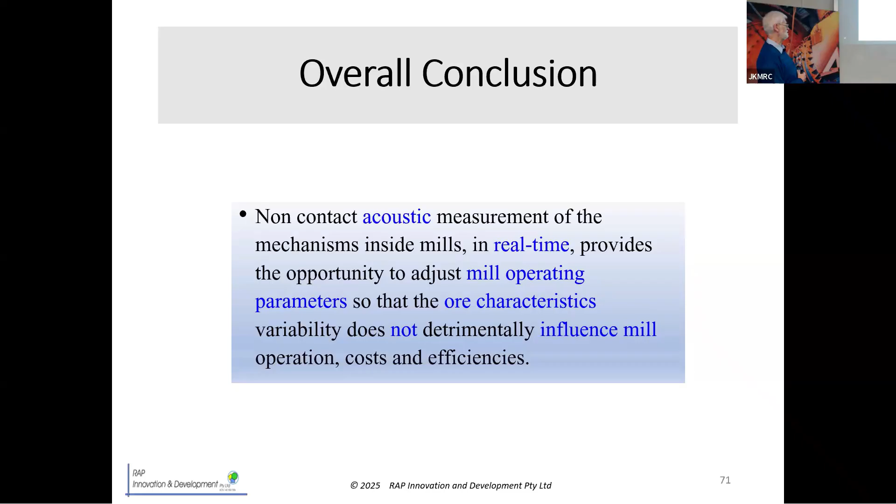The overall conclusion is a sentence: non-contact acoustic measurement of mechanisms inside a mill in real time provides the opportunity to adjust mill operating parameters so that ore characteristic variability does not detrimentally influence mill operation costs and efficiencies.

I'd like to acknowledge all sorts of people in my wanderings around the globe. One year I did 9 months travel, which is too much.

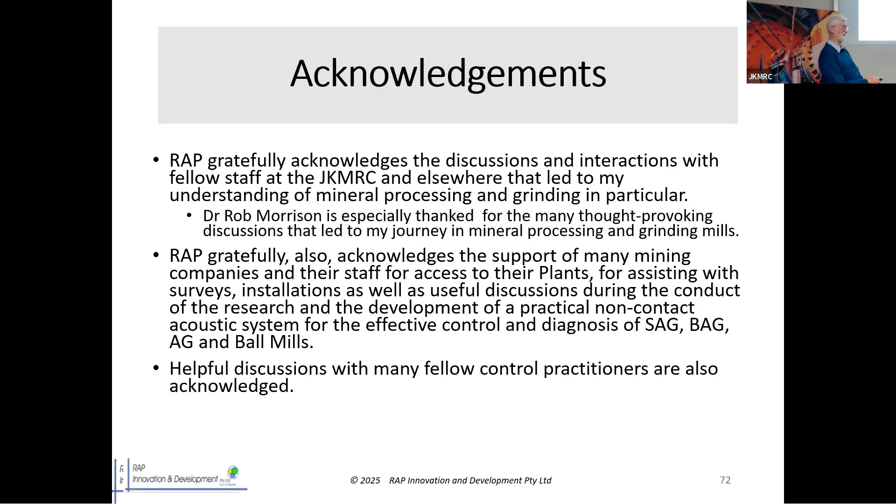So all the guys out there, the people here, and I'd like to particularly thank Rob Morrison when he was the manager of JK Tech, who introduced me to sag milling and converted my thought of 'you've got to be kidding, this is just steel balls and a tube' to 'this is much more complicated than that.' And I'm still learning about it, I'm seeing new stuff in mills all the time.

Thank you for listening.

My hearing isn't perfect. So, okay, thank you. That was very interesting. As a health and safety person, normally I'm used to seeing noise done from what humans are being exposed to perspective. So it's great to see it being used for machine diagnostics as well.

Another thing we do is I'm seeing whole body vibration data being used to do predictive analytics for some of the equipment. Have you thought about incorporating the acoustics and the vibration together? Could that give condition monitoring of equipment, any more insights?

It's really hard to persuade the people out there to fund that sort of work, because the people I've found I'm speaking to already know a really great bit of software that helps them schedule maintenance. They don't want to do additional maintenance, or they don't want to do preventative maintenance. In this industry, it's rather bad because they let equipment go to failure, which is crazy.